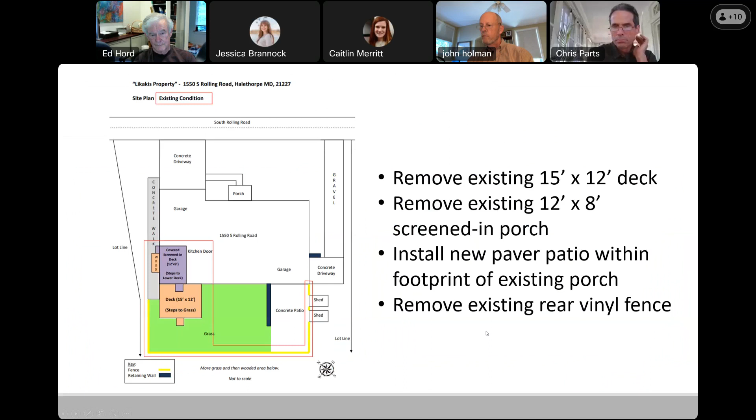First we have agenda item number 5, the Likakis property at 1550 South Rolling Road in Relay, County Council District number 1. This is a non-contributing resource within the Relay County Historic District, and the applicants have proposed removal of the existing rear deck and screened-in porch, installation of a paver patio and associated grading, and additionally a rear fence removal.

Then we have agenda item number 8, the DeLisa property at 111 North Beechwood Avenue in Catonsville, County Council District number 1. This is a contributing resource within the Old Catonsville National Register Historic District, and the applicant is seeking Part 2 approval for in-kind slate roof repairs.

Thank you, Jessica. Commissioners, is everybody okay with these items staying on the consent agenda, or do we need to pull one off for further consideration?

Hearing no objections, may I have a motion to approve the consent agenda? I would move that we approve the consent agenda. And a second? I'll second it. Thank you.

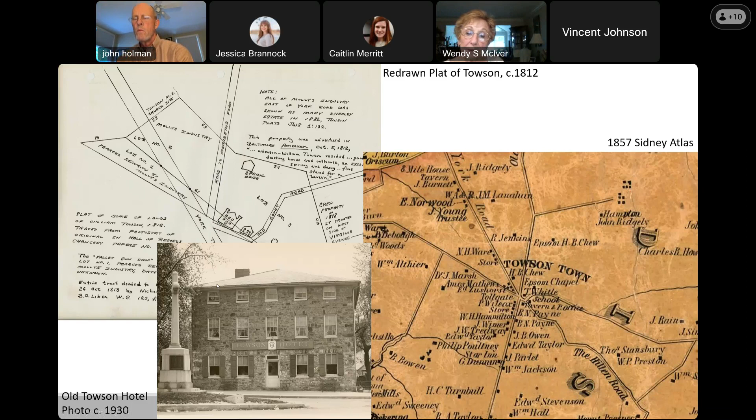The omnibus was replaced by the streetcar rail system, which reached Towson around 1863. The growth of Towson paralleled these advances in transportation. As a result, several planned subdivisions developed in various stages on the former country estates of the Harrison, Brown, Register, and Owens families.

The Idlewild community was laid out on the Register family estate. On the Harrison estate, started the community of Anneslie, and Stoneleigh was on the Brown estate.

The Owens farm, known as Aigburth Vale, located north of the Stevenson farm on the south edge of Towson, began its subdivision after the death of Johnny Owens in 1889, following the lead of adjoining property owner and trustee of the Owens estate, David E. McIntosh.

David McIntosh was a Towson lawyer who initiated the first wave of subdivision on the south edge of Towson town following his 1877 purchase of 9.5 acres south of Hillen Road on the east side of the York Turnpike.

McIntosh immediately subdivided the parcel, and in 1878 he leased his first lot to John McGrain. In 1881, John McGrain purchased his leased lot on Willow Avenue for $425.

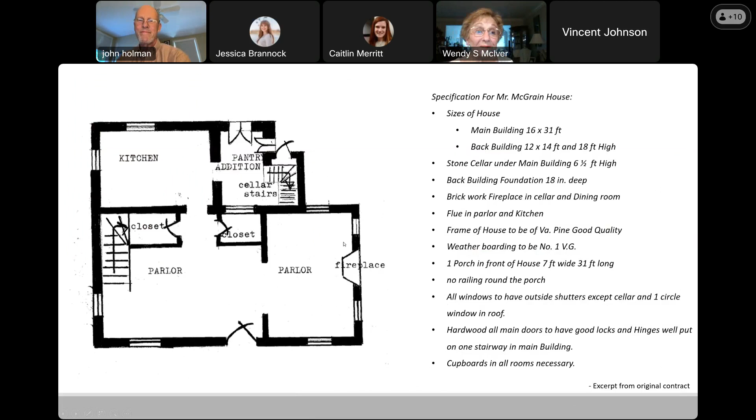The two-story frame house was constructed in the vernacular style with a center cross gable roof and a rear kitchen ell.

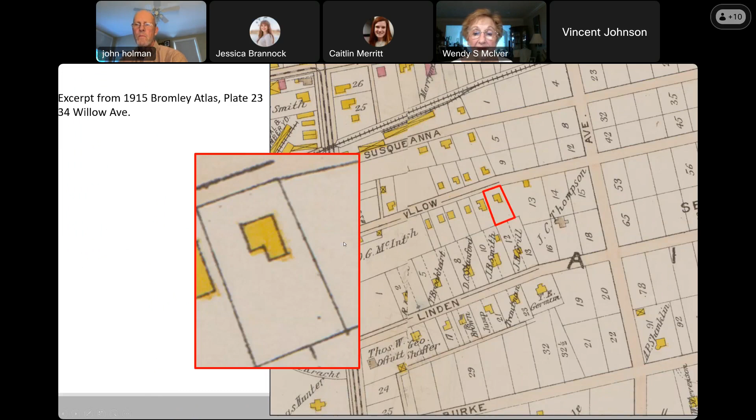The interior plan is consistent with an I-house plan, which is a structure that is 2 rooms wide and 1 room deep. This style of dwelling was very commonplace during the 18th and throughout the 19th century. Many of these structures had rear L additions, creating an L footprint.

By the late 19th century, this style was easily elaborated with front porches and other decorative details. This is also sometimes referred to as a folk Victorian style.

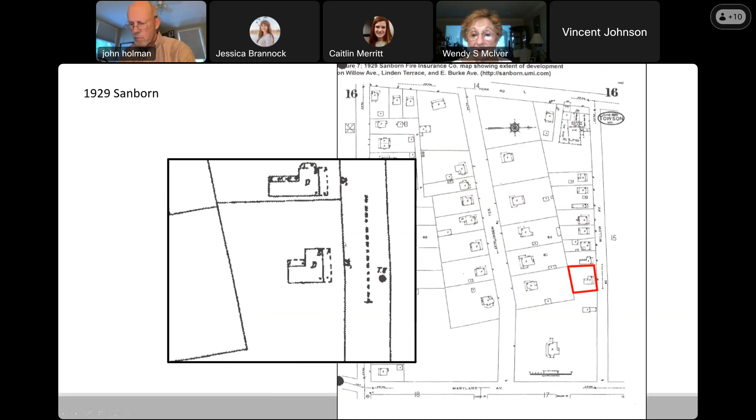At the time of the McGrain's house's construction, the spread of Victorian era styles was made possible by railroads expanding into smaller towns and cities. Architectural pattern books and trade books were a popular trend during the late 19th century and early 20th century, with A.J. Downing's being one of the popular ones.

These books were easily available to local contractors and builders, and designs could easily be altered for all classes. Post-Civil War factories had machines capable of mass-producing standardized housing elements, which made it easier to add elaborate details to vernacular dwellings, including items like turned posts, spindlework detailing, and decorative brackets and molding.

Mass-produced wood features could be transported quickly and cheaply almost anywhere by train. This made it easier to apply architectural forms to suburban residences of all classes. Home builders often simply added trim and ornament to traditional folk or vernacular houses. Older vernacular dwellings were often updated with new ornamentation now available everywhere due to these pattern books and mass production and sale of wood features.

It is evident that the McGrain house, as well as other houses in Baltimore County, shares this architectural style, as is shown on the McGrain house and other houses within Baltimore County with a similar style.

John McGrain was born in County Meath, Ireland in 1825. He and his wife entered the United States sometime in the early 1850s through New York City. Prior to moving to Baltimore County in the early 1860s, his family resided in Montgomery County. John and his wife had 6 children: John, James, Thomas, Owen, Mary, and William.

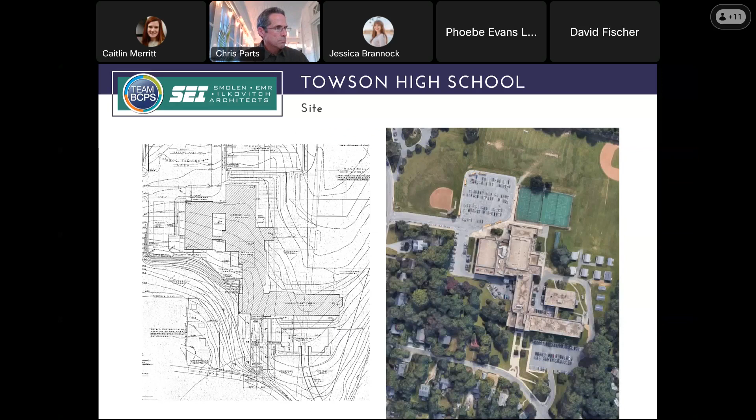Here you can see the existing site on the left, with what the site currently looks like today on the right — just general context of where we are. We are right adjacent to the Aigburth Vale property, as well as across the street from the East Burke Avenue Historic District. Our building is on both the county list as well as the Maryland Inventory of Historic Properties.

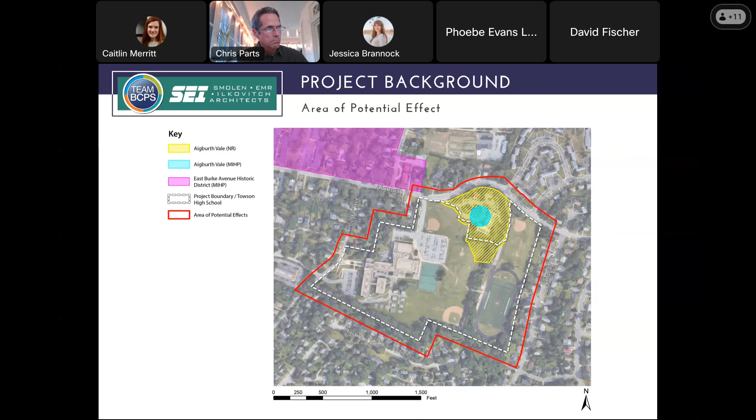Our building has been modified several times over the years, originally constructed in 1949 with an addition shortly after in '53, and additions throughout the time. One quick note: the 1998 alteration was rather extensive — every inch of the building was touched, including all new exterior doors, all new windows, and all new roofing.

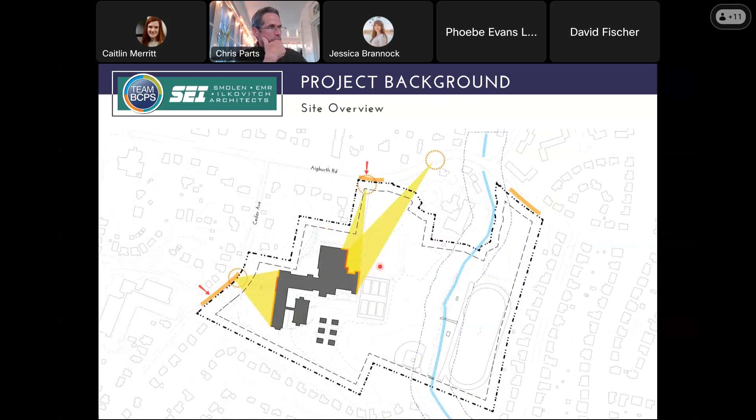Turn on my pointer. Our main entrance, which is visible off of Cedar Avenue, and kind of the auditorium entrance. I'll show you some photos of those in just a moment. Here's the moment, our main entrance and the auditorium entrance at the bottom.

So identifying some various character defining elements, the fieldstone, the horizontality. It's fairly typical of this kind of mid-century, early mid-century, late modern time period.

While we're primarily talking about the exterior for the Landmark Preservation Commission, we are dealing with the interiors as well in our work with the Maryland Historic Trust. Most of this interior has been pretty significantly affected and is no longer really intact, with the exception of our main lobby, which is at the top, as well as the lobby to the auditorium at the bottom. And then there's also existing terrazzo flooring in our corridors that's still intact.

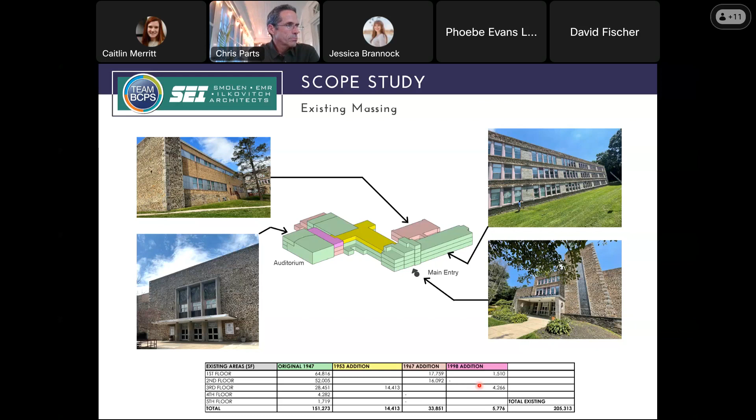So, just background on the building. When we started this project way back when, the first step was really identifying what is an acceptable scope that really balances all the needs of both this being a school building, a public building and part of the community, as well as a historic building speaking to the generations of Towson students that have passed through here. So with that in mind, we went through a process of identifying a full range of options.

They were receiving plenty of feedback throughout the beginning of this job, with people asking for various preferences, wanting to keep, wanting to demolish and start over.

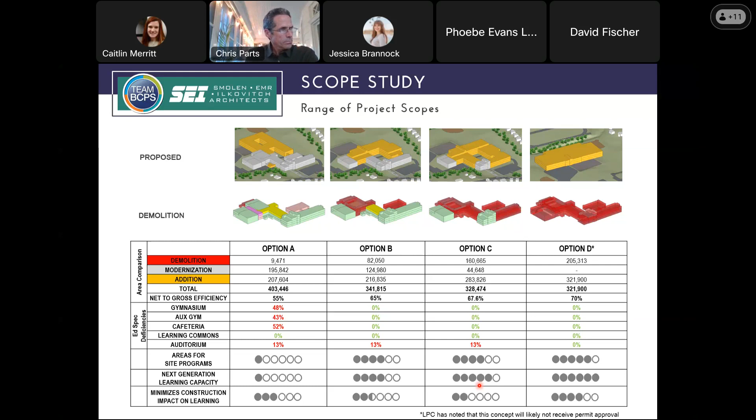And what we found was about half the people wanted to fully replace it with a brand new school, and half the people wanted to maintain the historic fabric.

We also got formal feedback from the LPC here, kind of outlining that option D, of totally tearing down the building and replacing it, would not work, would not be in compliance with county code, and we would not be able to get a permit going that route.

Similarly, with option A, they kind of understood that that wasn't really feasible to meet the educational needs of the community. So with that in mind, we ended up striking the options that didn't work and realized that we were going to need to find someplace in the middle. Surprise, surprise, trying to balance out all the varying needs, we ended up right in the middle.

So we looked to create an option that was even between B and C, right smack dab in the middle. This is where we ended up with the scope study, keeping our most historically significant wings: the historic auditorium, the 1949 classroom wing, and main entrance feature, demolishing many of the additions that were put on in 1967 and 1998, and then demolishing some of the larger public volumes from the 1949 construction that just really couldn't accommodate current needs due to their spatial limitations.

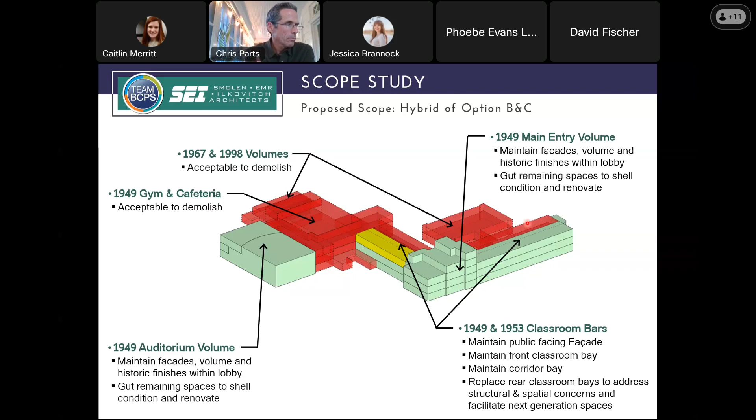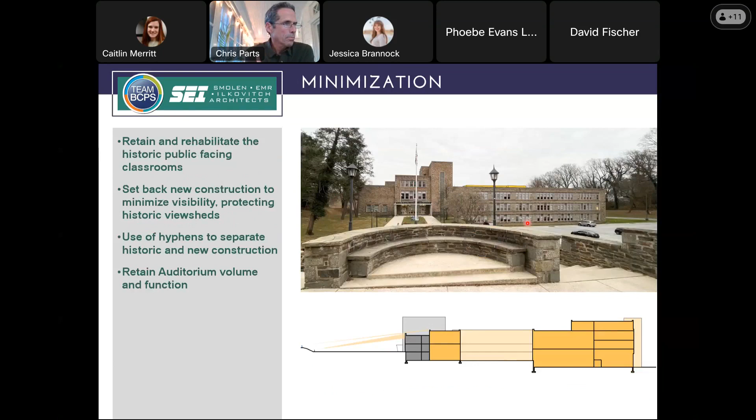This process also gave us some historic preservation strategies we came out with: what to avoid, retaining the most prominent elevations, keeping our intact interior spaces; how to minimize, making sure we're not overpowering the historic fabric by strategically locating additions; and then potential mitigation steps.

So restoring these beautiful bas-reliefs that are at the auditorium entrance, taking this historic clock off of the portion of the building that's being demolished and reincorporating that into our new design, as well as creating historic interpretation signage to locate in the public portion of the building.

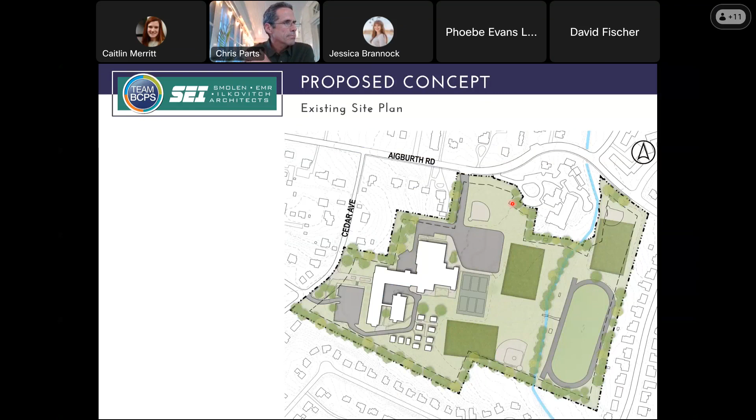So we're here to propose the final design. This is kind of where we want to show you where we ended up. We are refronting the school as one of the bigger moves of this job.

Most visitors come to the school off of Aigburth Road. That's where Google Maps sends you when you want to go to the school, so we want to make sure they're coming to the main entrance. With that in mind, though, we will be maintaining the historic entrance, including this formal entry plaza that faces Cedar Avenue. So the historic approach will remain very much the same for the neighborhood.

The building itself, you can kind of see in the gray are the areas that will be renovated. So the classrooms facing Cedar Avenue and the existing corridor, as well as the auditorium, which will be kept and maintained as an auditorium in the same location, and then a series of additions around there.

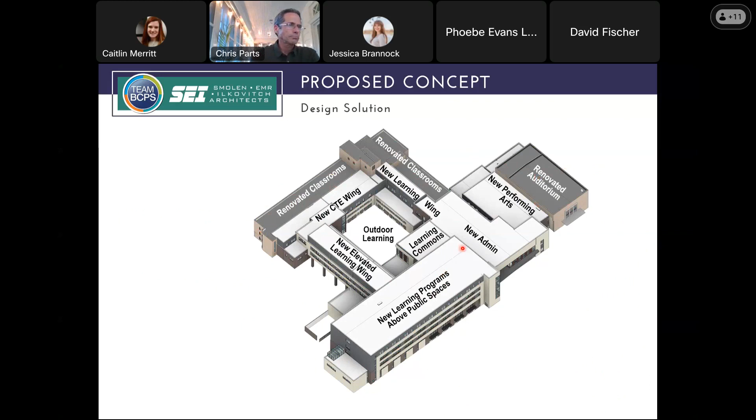So our new main entrance would be on the opposite side. As I mentioned, we're refronting the building, so we'll be right next to the auditorium entrance.

We're actually going down a level from there, just like the historic building was built into the hill. We're trying to do something similar here, with the thought process being we're trying to put a lot of new program on this site, and we wanted to try to tuck it into the topography as much as possible to help minimize the scale of this addition and try to not overpower the historic building.

This axonometric here also gives you a great impression or understanding of how we're building at the back side of the historic wing with some really large volume spaces. And you can see these big rooms, how they would not be able to fit in a bay that was the same width as on the other side of the corridor.

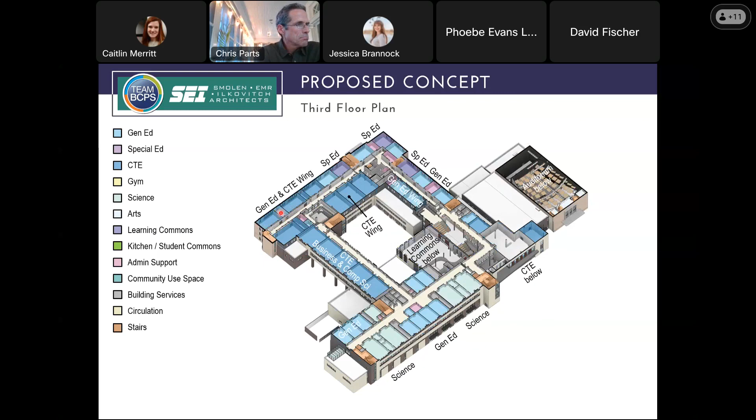So moving up, we are providing a third floor with a very similar footprint. And lastly, we do have a fourth floor in our addition here. And you'll notice this fourth floor is not any taller than the vertical elements of the historic main entry feature. All of our building's parapets are lower than that historic top parapet of the building.

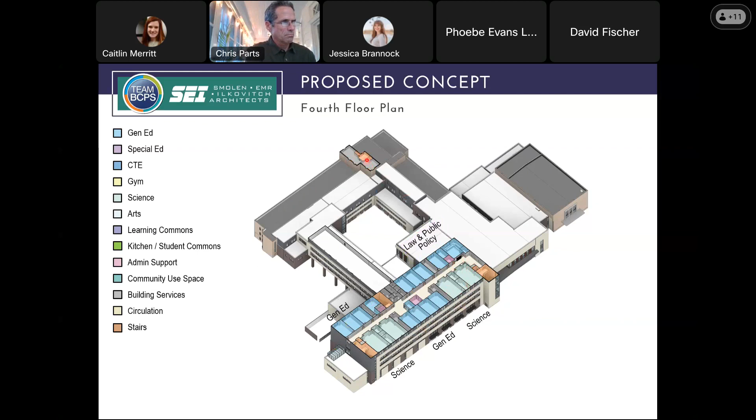So from the exterior, you can go through the elevations. And we wanted to make sure that our proposed design was sympathetic to the historic, but not looking to duplicate it. We want a clear distinction between what's existing and what's new.

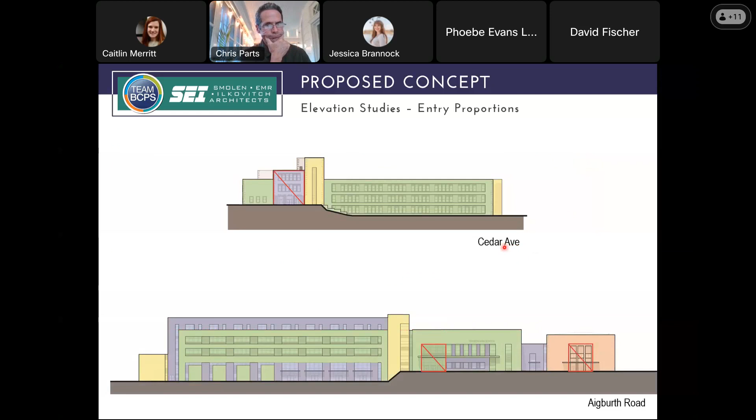So our process again started with analyzing the existing building. You can see on top is the Cedar Avenue facade, trying to understand the principles of this composition so we can then utilize those principles to guide our new design—identifying items like key datum lines, proportions of entry spaces, the rhythm of glazing, and where there's openings versus where there's solids.

Trying to utilize those elements into the new design that you see down below, with a strong emphasis on the horizontality of the classroom bar, a vertical tower element at the main entrance to signify this is where you need to come to get in, recessing our top story back visually with the change of materials, and creating that strong datum across the top that is lower than the main entry feature.

We're also utilizing what we were calling little hyphens. So where we are touching the historic, we're trying to touch it as lightly as possible with vertical slot windows of glass, as well as changing materials to a darker tone to kind of recede from view, as well as making sure the parapet lines where we're connecting are just a little bit lower and set back in plan, to just gently touch the auditorium, the historic building, as lightly as possible.

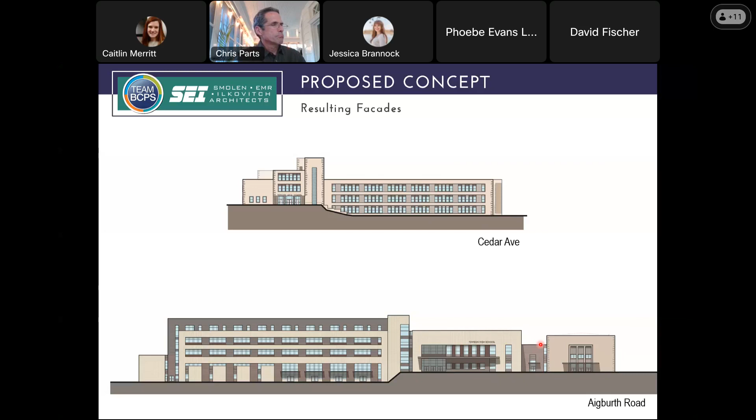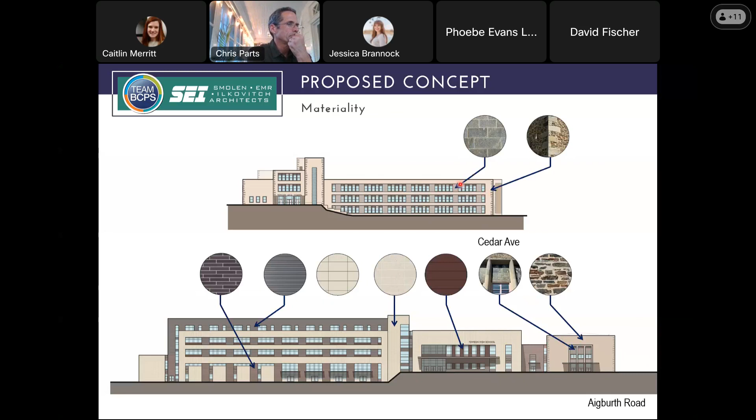Materiality is very crucial in this. We aren't looking to replicate the field stone or the granite of the historic building, because those aren't really appropriate for current school construction. That's not how schools are built these days. We want something that speaks to 2024.

So for our new building, we're utilizing predominantly masonry construction. What you see in the beige, this color here, is a concrete masonry unit, a kind of cream beige color. The title from the company is called Briar, and it really draws its inspiration from the thick mortar lines of the historic fieldstone building, trying to tie in a warm background for our field.

The vertical elements slicing through replicate the granite infill, and the horizontal banding of the classroom wing uses an iron spot brick. We'll be using a 2 1/4 by 16-inch brick, trying to get a long horizontality to speak to the horizontality of the building.

In certain locations, we transition to metal panels where structurally it makes sense to reduce our loads. So to speak to the dark brick, we have a horizontal metal panel. And on the back side of the building, rather than using the beige concrete masonry unit, we switched to a similarly colored metal panel also.

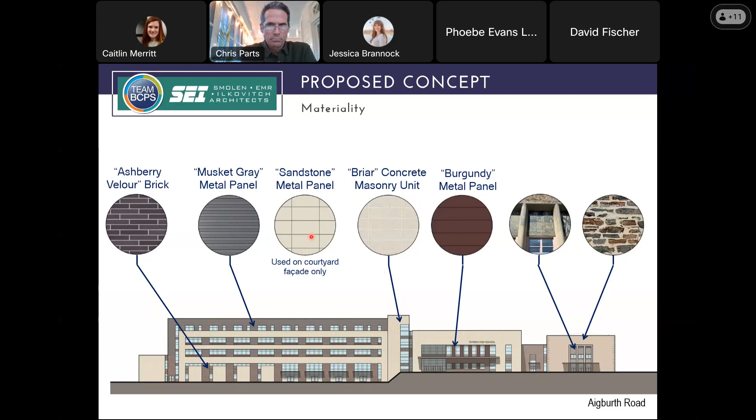So with that, I do have a video fly through. If we're doing okay on time, I'll try to get it to play. There we go, just to show how this thing goes through.

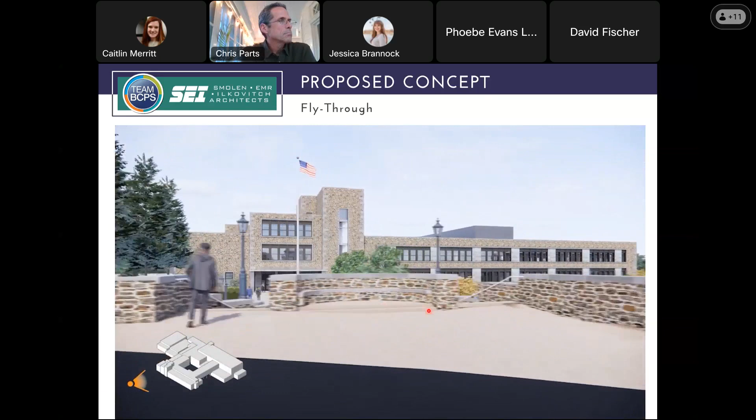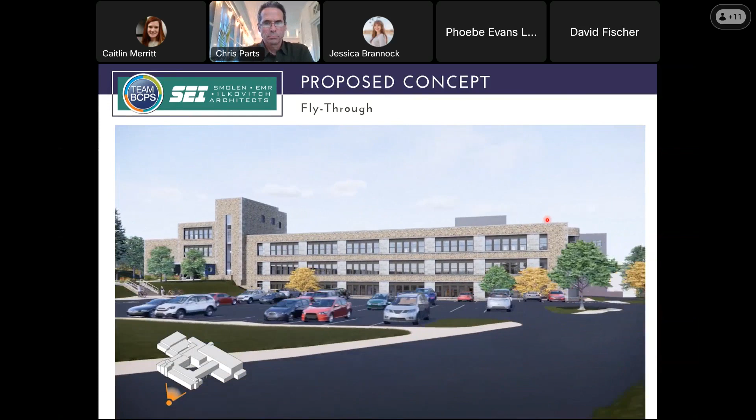You can see from the Cedar Avenue side, the appearance stays very much the same. You see a small peeking out of some of the penthouses of the new addition, but for the most part we're really tucked around and underneath to minimize the impact on the front appearance. From a drone, you'll see we are adding quite a bit of program, but from the human eye level it's really minimized by building down the hill and recessing this into the lowest part of the site.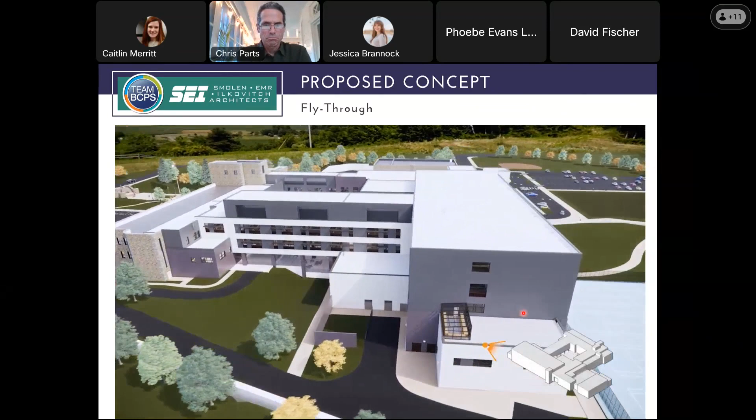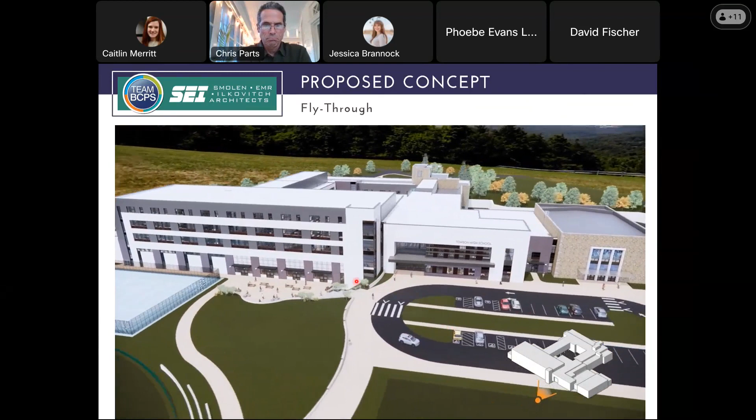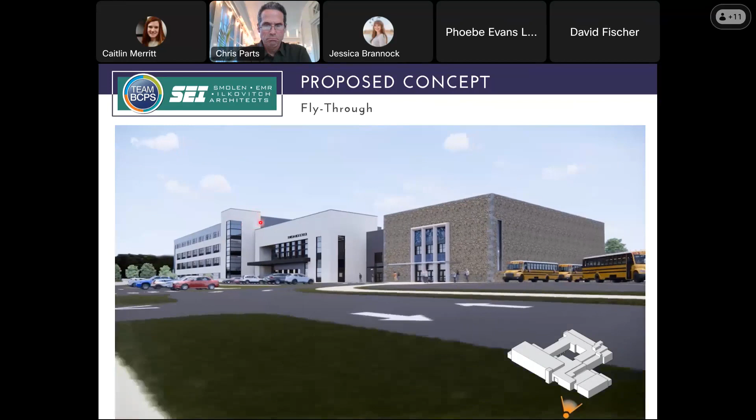Coming around to the front, you can see again how we're recessing it into the hill so that public-facing functions on the lowest level can still be accessible from the main entry level, but again it helps us bring this building down. You can see our vertical tower element here, replicating the idea of the vertical tower element at the front, with the relocated clock right there beckoning people into the site where they're coming to the main entrance.

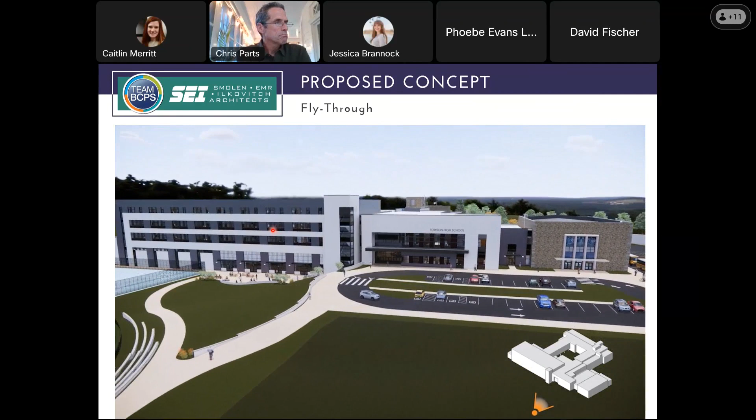You see the horizontal elements of this classroom wing similar to the existing building, and this tower is really a strong focal point to draw people to the main entrance. Our tower is just a few inches shorter than the historic tower, but very similar height.

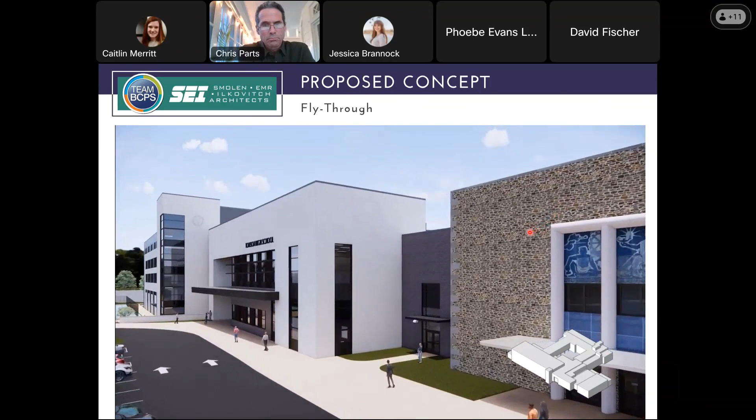Taking a couple sections through here, you can kind of see the new lobby with that communicating stair that draws people up to the second floor.

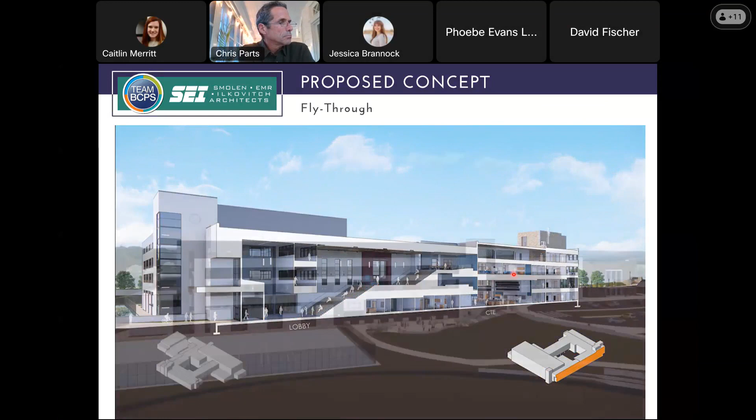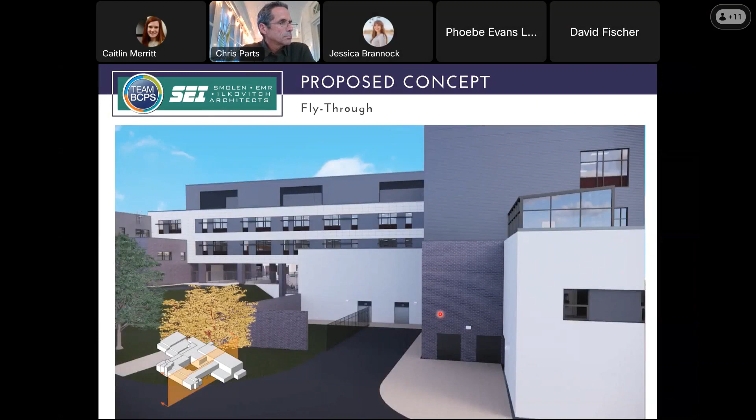Then coming around the other side, we'll cut a couple more sections to see how this is tucked into the hill to minimize the visibility from Cedar Avenue, trying to hide it as much as possible behind this parapet, with our construction built on top of the public spaces to keep this footprint as tight as possible.

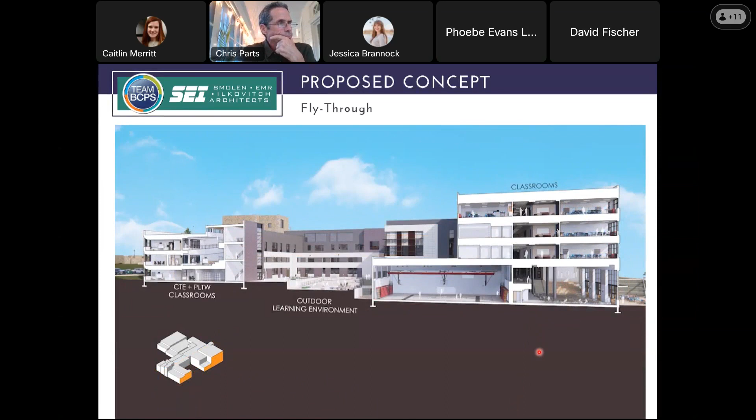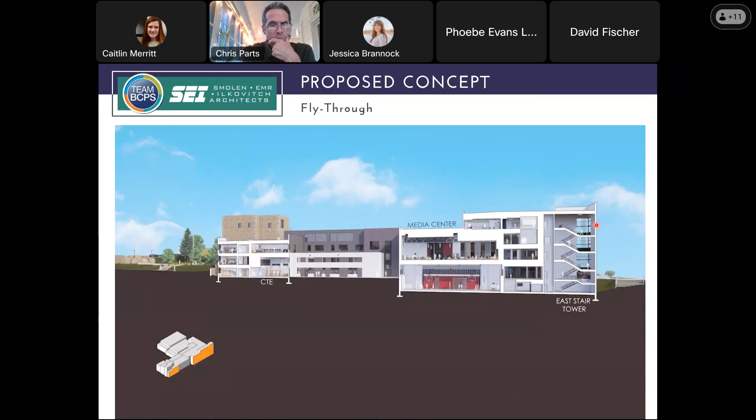So that stair tower element at the main entrance, and coming across the front, really emphasizing the horizontality of this facade. The way this rendered, this building looks really white. Apologies for that. It is going to be more of a warmer cream color, like the mortar joints of the historic fieldstone wall.

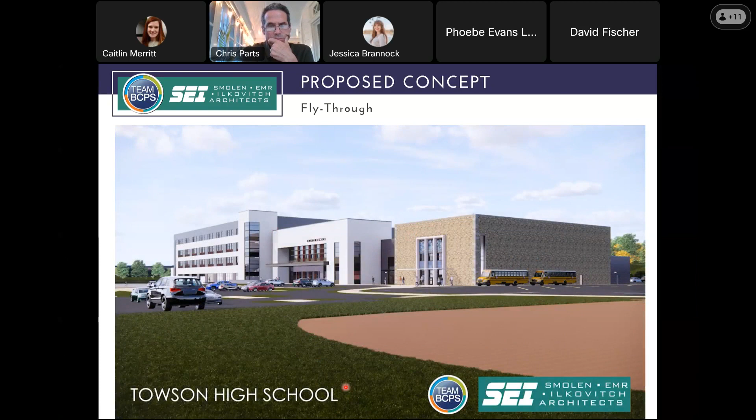All right, so just a couple stills from that video.

And with that, I'd love to end the presentation and speak to any comments or questions you may have.

Thank you so much, David. Very well done and thorough as the other times I've seen it. So very good. Commissioners, any questions or thoughts on what we've seen? John, I have a quick question.

What will be the student capacity for the new school? The proposed capacity, we're building to a core capacity of around a little just over 1,800 students.

So by core capacity, that means the large cafeterias and gyms are built for the size of 1,800 students. We actually don't have enough classrooms for that many. We're under 1,800 - that's the true capacity we're building for, but just in case down the road there are more students, we want to make sure we're building those core spaces large enough, about a third larger than the current capacity. They've got more students than they have capacity for - about 1,200 is the current capacity.

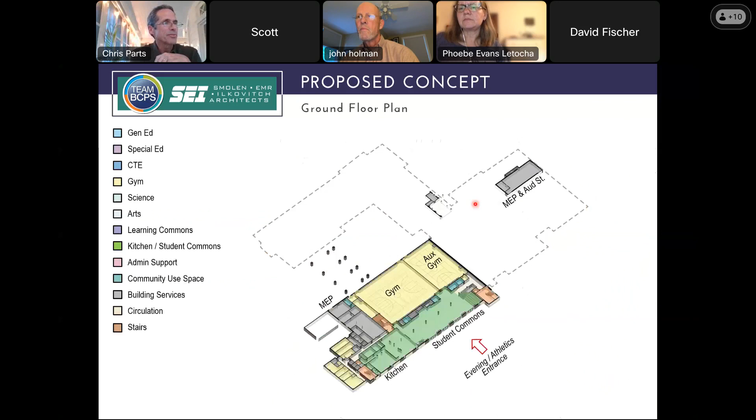I think one is, if you take a look at the east elevation, you had shown some entrance proportions in one of your diagrams, and it looks to me like the new entrance in that green piece is kind of just an overlay. You don't really read that as proportional in a similar way to the auditorium entrance, and I don't feel like the facade really reads that way if that's something you're trying to carry off. Similarly, on that facade, I think the lines you've got horizontally carry similarly to what was done on the front over that long stretch. But it seems that the vertical rectangles at the bottom kind of diminish the secondary piece of the vertical that you're reading behind that.

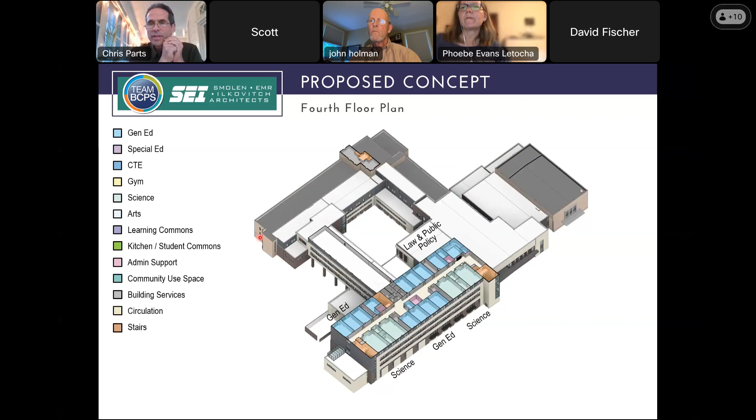My last comment is on the south elevation, basically the tower that faces the community - the Wiltondale community, I guess - where almost everything except the end of the original building on the far left is new. There's a large, I think 4-story volume there. The way most other large volumes of the building have been treated is to take a larger volume like that and create an element within it, like a framed element, like you'd see at the entrances. It looks like there are just some punched windows in the side of that. I'm concerned that if we're trying to align with the similar character of the original building, taking that larger gray volume and looking at it as an element that captures a larger volume within it might be a friendlier relationship to what the original building had done in the way they created elements in it. Those are the thoughts that I had.

Thank you, Chris. Anything you want to add to that, David?

So this side is really where we're placing a lot of our service elements, so it's a lot of programmatic drivers to not have us looking down onto that space. Also, within this window here, that's kind of defining our corridor. The other sides are classrooms, and within a classroom or teaching space, wall space is really a premium, be it for cabinetry or display boards. So it gets problematic from a programming standpoint to have a ton of windows.

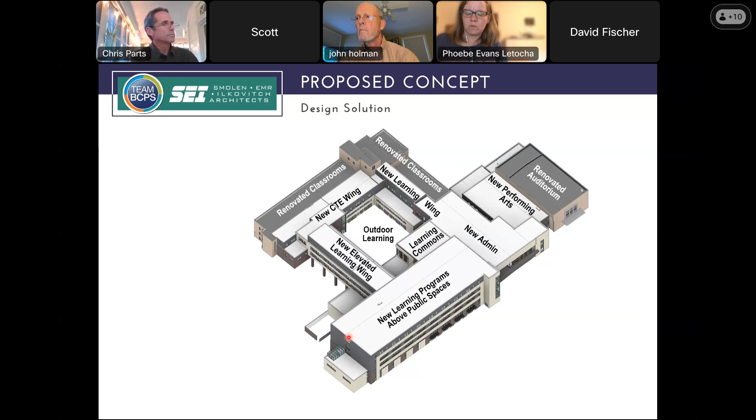This is Lili Mundroff. I did have some comments on the selection of exterior materials and how they relate to the existing building. My concern, especially with the new facade or the new entrance, is that there seems to be an introduction of a lot of different materials and colors. I understand that the original building was built over time, but there is a consistency with what's there, a consistency of natural colors and simplicity.

I appreciate that there is an intent to continue the rhythm of the windows and the way the volumes read, but my concern is that there seems to be a lot of colors and difference of materials, such that perhaps you lose that simplicity of what the original building was like.

So I'd like to see an opportunity to investigate whether some of the new colors, especially like the white—which I understand is more of a light taupe—reads very differently as a different volume. It has a different scale and texture than the existing, and that is quite in contrast with the gray and the dark brick that is selected.

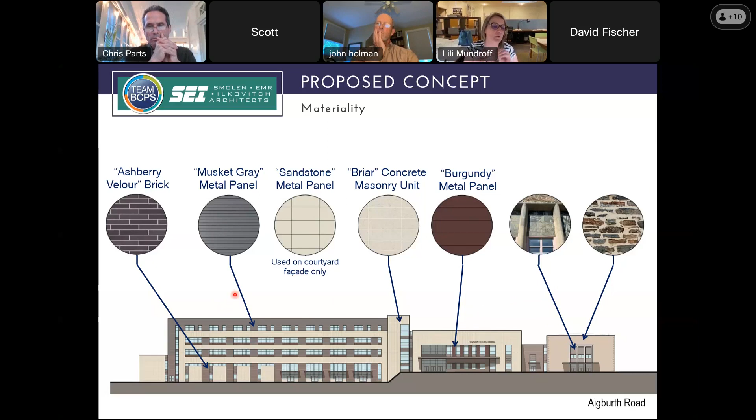One of the interesting things on the original main facade is that the ribbon windows and the panels in between them have very similar colors. Here on the new entrance, the in-between panels are taking the darker offset and bringing that back in, so you get a different reading of the horizontality of these windows—by nature of the colors, the vertical elements behind start to read as taller and more vertical.

So I just wanted to see some further studies on the materials and colors, because I do think they change from the original sense of simplicity, linearity, and horizontality that these classroom spaces had from the front.

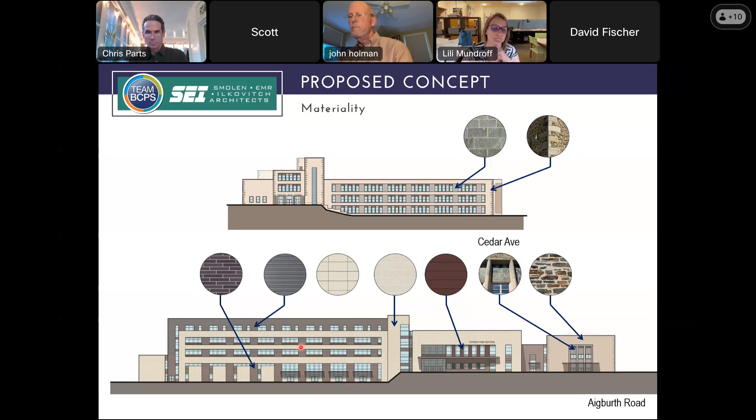Thank you, Lili. Any other comments? Yeah, this is Phoebe.

I had a question that you didn't cover in the presentation, but I noticed in the packet, and that has to do with the signage. Am I correct that there is going to be a digital sign for one of the entrances? I know currently there are two signs for the school—one on the Cedar Avenue entrance, which is kind of up above the parking lot by a beautiful weeping cherry tree, and another one on the Aigburth Road side, which is not as attractive looking.

So what is happening with those signs? I don't know the age of when they were put in, in terms of the period of significance, but I'm questioning the placement of digital signage and what's the theory behind it. I know some other BCPS schools, like in the Towson area, had some controversy related to digital signage.

So the older sign that's on Cedar Avenue, we're planning on leaving as is and not disturbing. The newer sign, which I believe is part of the 1998 project on Aigburth, we will be replacing, and that is where the new digital signage is scheduled to go.

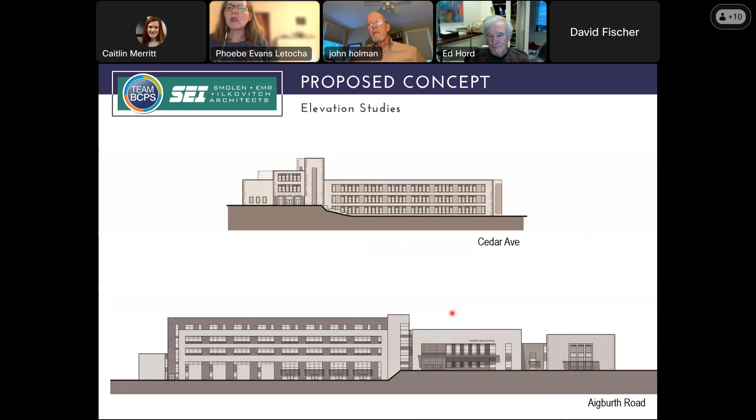The large gray mass there, I think, needs some definition—I don't know how to design it for you, but I think it ought to feel more like the one on the front entrance. If you're trying to match that, which I think is a good idea for the main entrance, to have a dialogue between the back entrance and the front entrance, having them more similar makes a lot of sense. I like the concept, but I don't think it's working—what you've got isn't getting there. So I agree with Chris, I think you need to re-look at the main entry element on this Aigburth Road entrance elevation.

One of the struggles we really had on this was there are a lot of entrances to this school—there's the historic main entrance off Cedar that we're maintaining, and also this historic auditorium entrance. Rather than picking one of the two, we tried to hybridize them and come up with something that would bring both historic entrances into unison with this new entrance. So certainly the tower element speaks to the Cedar Avenue entrance, and from the auditorium entrance, there's this really strong portal motif they've created—that's where this portal shape we've tried to create here is generated from. So it's certainly not a direct replica.

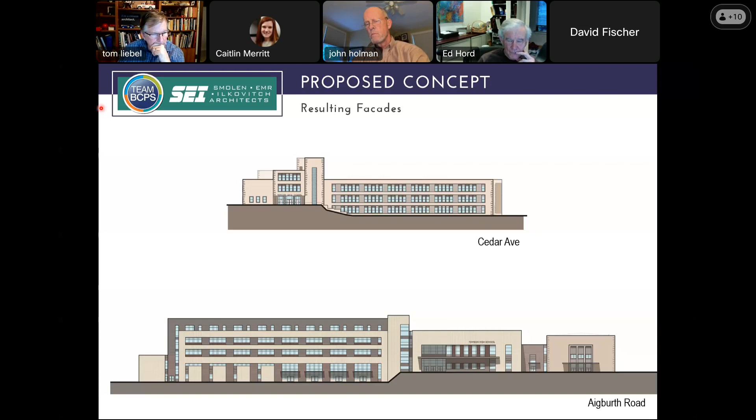So we liked the concrete masonry, and the Cedar Avenue entrance is the historic entrance, we're really trying to maintain that effect along Cedar. But this backside on Aigburth, while the building itself is landmark, doesn't have the same visibility from the streets as the Cedar Avenue entrance, as Dave pointed out from that front slide. So we took that into consideration when looking at it, and then at the main office itself.

We have our entrance, and then we have to think, from the CPTED and safety security standpoint, that we want visibility. So that's where we landed on a lot of these larger height windows and things like that to increase that. So we don't take lightly that it's on the landmarks list, but at the same time, we need to make sure we're meeting all of our criteria, because this building's going to be here for another 50 plus years before we get around to doing significant work on it again.

So we need to look at longevity of the materials, the safety and security, which is a huge thing now, and then the function for the school as well as the community. It's a hard balance, but we've put a lot of work and effort into this to get to the point that we are.

I know we're calling this a concept, and I know we've had several community meetings and made several submissions to the state at this point. I just don't know. I guess, Dave, I'll lean it back on you, but revisiting all of the materials again right now, I think is a lot, and it's really going to significantly affect the schedule of this building.

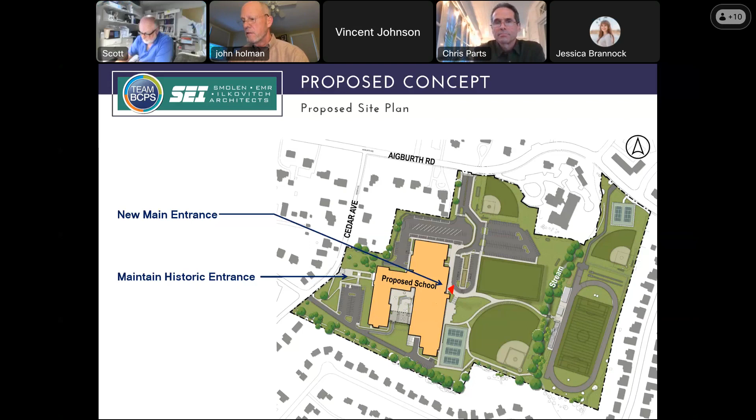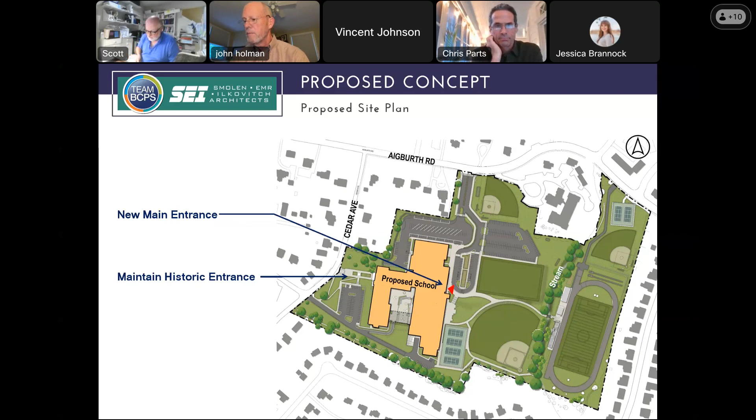And now we're on to item number 7, moving right along to the D'Antonio property at 1714 Kurtz Avenue. This is Lutherville County Council District Number 3, a non-contributing resource within the Lutherville County Historic District. The applicant has proposed the installation of a fence in the rear yard.

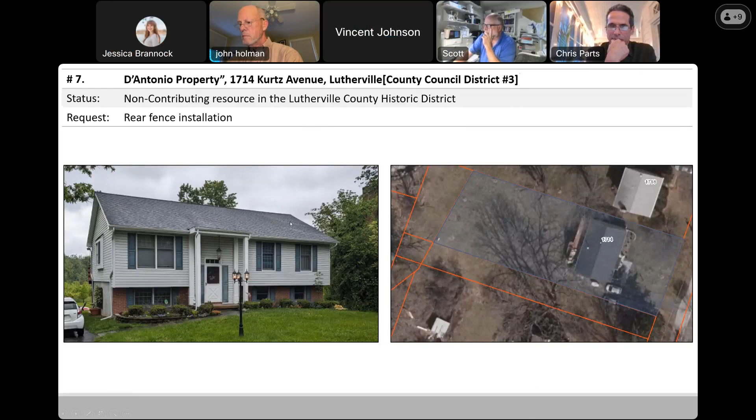They wish to enclose the rear yard and adjacent parcel with a 4-foot tall white vinyl picket fence. The fencing will begin at the rear corners of the home and consists of connecting 4 by 8-foot vinyl fence segments with dog ear pickets in the style Glendale Veranda.

The property is considerably set back from Kurtz Avenue, and the proposed fence installation will have limited visibility from the public right-of-way. The fence is properly located in the rear yard. The height and spaced picket style are appropriate. However, the vinyl material is not an appropriate material choice within the Lutherville County Historic District, and existing fencing material in the surrounding community that have been approved in the past have typically been wood or black aluminum.

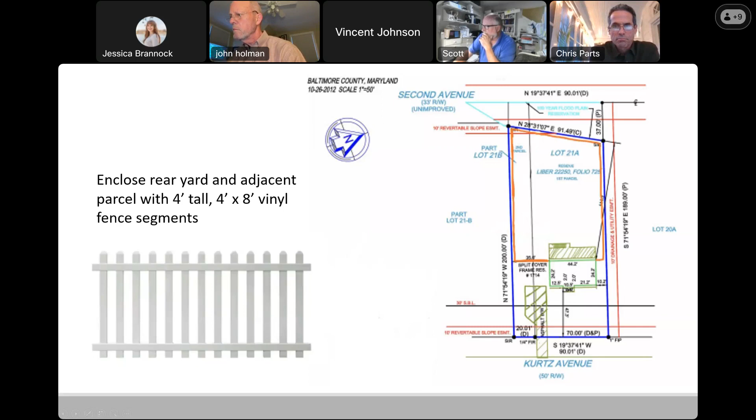The guidelines cite Chapter 6, new construction addition and non-contributing resources, as well as Chapter 7, fences and landscape. We did have a letter from the Lutherville Advisory Committee circulated to the commission earlier in the week. Staff would also note that vinyl fencing may be considered on a case-by-case basis, and that the fencing should be of an appropriate aesthetic quality that complements the building or county historic district, referring to existing fences in the surrounding community for assistance. Staff's recommendation is for the LPC to determine if the request meets our design guidelines and to approve, modify, or deny accordingly.

Thank you, Jessica. So we have before us an application to put a vinyl fence up, which may or may not meet the guidelines. Any thoughts, commissioners? Any questions?

Well, just I was curious if I'm reading my Google map correctly. It looks like this property backs up to a treed area and then to the parking lot of one of the shopping centers off of York Road. So it doesn't back up to, I mean, they have two side neighbors but no back neighbors. Sure, you can sort of see it in the one photo that there's the parking lot back in the distance. Yeah, typically, if you can see it from the road, it's a concern for us. We have in the past not approved vinyl fencing in neighborhoods. There's one case where it was on the very edge of a historic district, against a parking lot in a non-historic district.

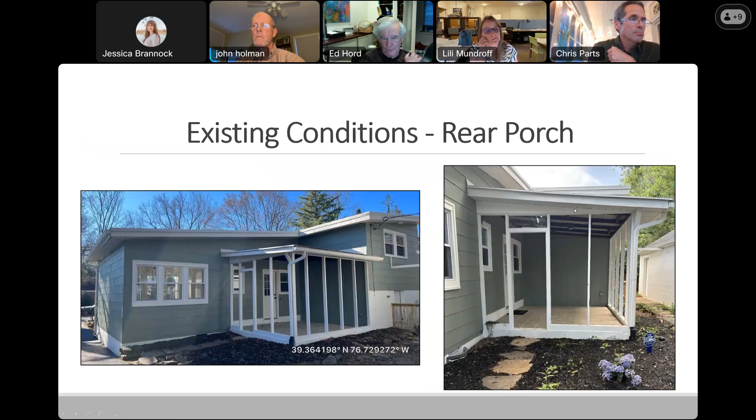Work item 1 is for the roof replacement and new gutter system installation. This includes removal of the existing roof and gutter system, replacing the roof with an SBS self-adhering rolled rubber roofing, replacing the gutter system with white aluminum K-style gutters and downspout in the same location as existing. A 12.75 by 0.5 by 4-inch solid vinyl soffit will be installed, and the walls will be framed with a new header support.

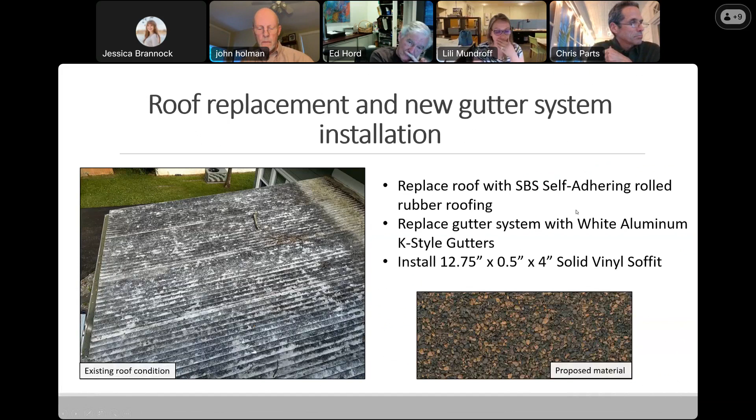Work item 2 is for windows and entry door: to install six 29-inch by 38-inch vinyl double hung windows by Windcore, and six 29-inch by 14-inch vinyl transom awning windows above each window, with one over the entry. To install a new 32 by 80-inch Therma-Tru entry door with a half light and two panels in an existing entry opening on the east elevation. Install new hardware and a vinyl rot-resistant frame. The interior and exterior will include AZEK synthetic trim lumber installed along the windows and doors, and finally a GAF 12-inch by 24-inch fiber cement shingle siding will be installed on the exterior and painted to match the existing asbestos tile on the main dwelling.

Finally, work item 3 is for the HVAC installation, which will include a Mitsubishi Sun Porch system installed to heat and cool the enclosed porch. Staff would like to note that the LPC does not have purview over the interior of the structure. So we're citing Chapter 5, porches and steps, as well as Chapter 6, new constructions, additions, and non-contributing structures. Staff's recommendation to the LPC is to determine if the proposal meets our design guidelines and approve, deny, or modify accordingly.

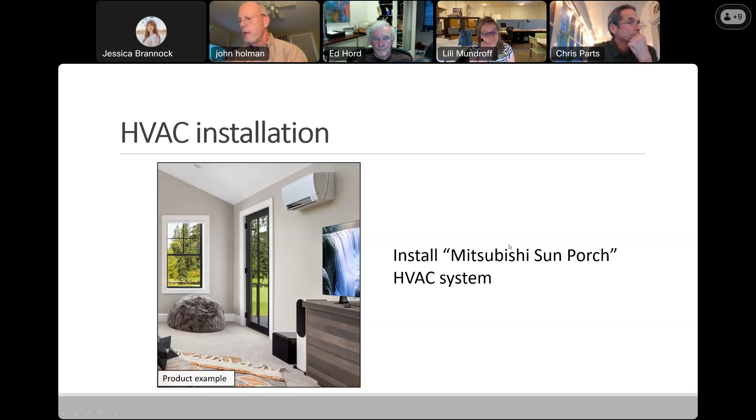Thank you, Jessica. So we've seen the plans and the materials. Any questions? Is the owner with us, by the way? Yes, we do have Mr. Dominic Smith online. Mr. Smith, I have you unmuted if there's anything you'd like to add.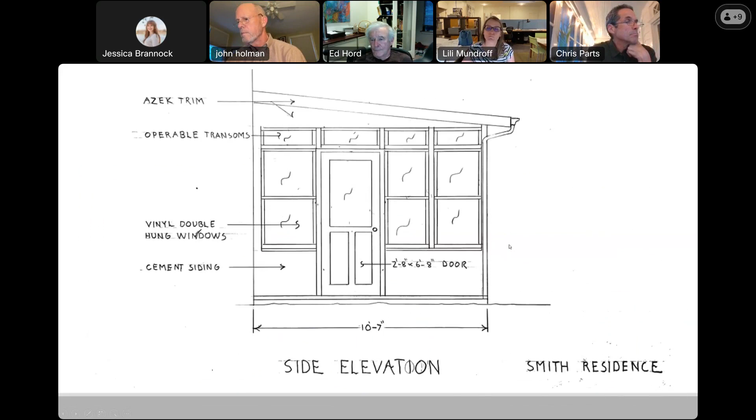I don't think so. You've got the plans there. I'm not sure if our contractor is still with us. He was at the beginning of the meeting, but I'm not sure if he's still there. What is the name of your contractor, if you could remind me?

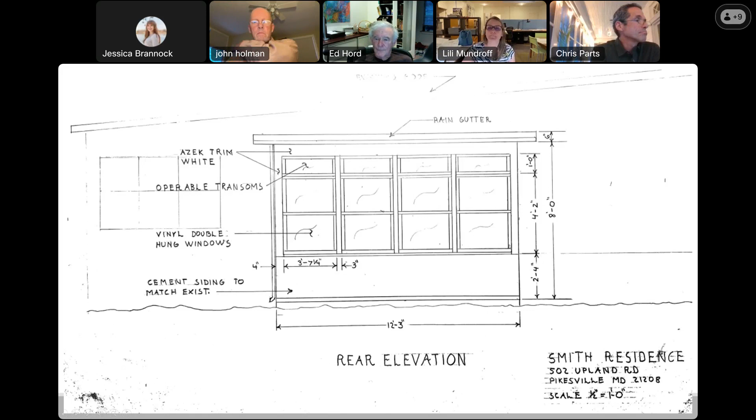Bill Frizzell. Yes, I do have Mr. Frizzell online. Mr. Frizzell, I've unmuted you if you have anything you'd like to say. Yes, I think you might have said vinyl siding.

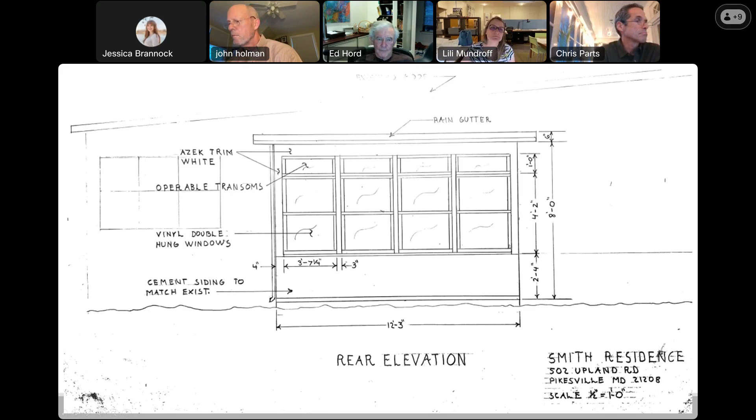Yeah, I may have erroneously said that. The siding is a cement siding that matches the house underneath the windows, not a vinyl siding. Okay, yeah, I have the GAF fiber cement siding shingle. Is that correct? Yes, that's it. Thank you for that clarification.

Any questions for either the owner or the contractor, commissioners? Hearing none, do we have any discussion? You're muted, Ed. Oh, Ed, I see your hand. I could make a motion that we could then discuss and decide if we want a second.

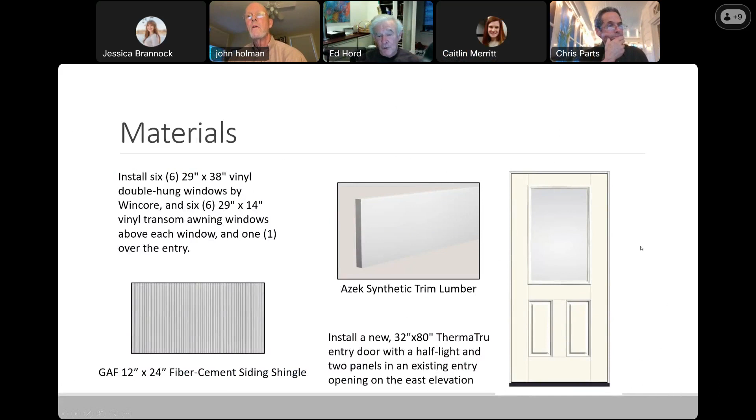I think we should approve. I move that we approve the design as presented. Second. Was that you, Tom, for the second? Yep. Thank you.

Jessica, a roll call vote? Have Lily, please. Yes. Tom, yes. Chris, yes. Vince, yes. Ed, yes. Dan, yes. Wendy, yes. Phoebe, yes. Scott, yes. And John, please. Yes. Great, thank you.

All right, moving along to agenda item 10, the Sease property at 1605 Front Avenue, Lutherville, County Council District Number 3. This is a non-contributing resource within the Lutherville County Historic District. The applicants have proposed the construction of a detached one-story, one-car garage in the rear yard and driveway extension.

This prefabricated garage will be 14 by 28 feet with an overall height of 11 feet and 8 inches in the rear yard. The garage will be set back 5 feet from the northern, or left, property line located adjacent to the rear deck.

The applicant also proposes to extend the existing driveway by 30 feet to access the proposed garage and then pave and resurface the entire driveway to be cohesive. The garage will sit on a poured concrete slab and the frame structure will have a front end gable roof.

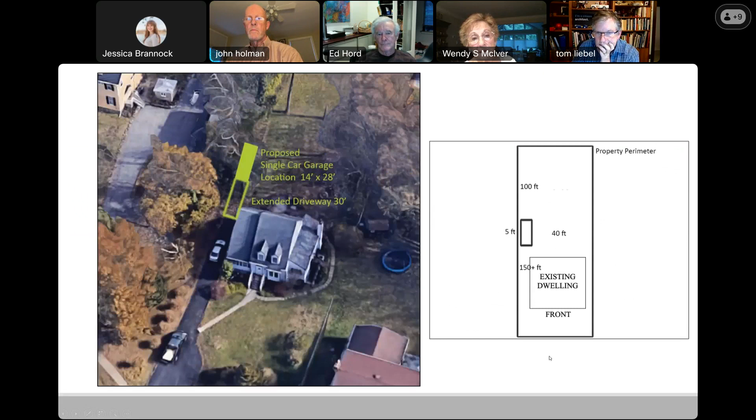Staff notes that the location, size, and height of the proposed garage are consistent with our design guidelines, and the material choice for the exterior is consistent with the materials on the primary structure. Staff's recommendation is for the LPC to determine if the proposal meets our design guidelines and to approve, deny, or modify accordingly, citing Chapter 6, new construction additions and non-contributing structures, County Code Section 32-7-405.

Thank you, Jessica. Is the owner with us? No, we do not have the owner with us tonight. Okay, commissioners, any questions, comments, thoughts?

I have a question. Do we know what other garages in the neighborhood or community look like, or what the surrounding properties look like? Most of the garages are detached for the historic, contributing properties. A lot of them are detached in the rear. This is a non-contributing property, so it's following a similar pattern of existing structures.

Any other thoughts, comments? I guess my only question is whether that is really compatible with the original structure. But it's non-contributing, so is that as critical? Well, so yes, this is a non-contributing structure, and staff noted that the location, size, and height are consistent with the design guidelines, and that the material is consistent with the material of the primary structure.

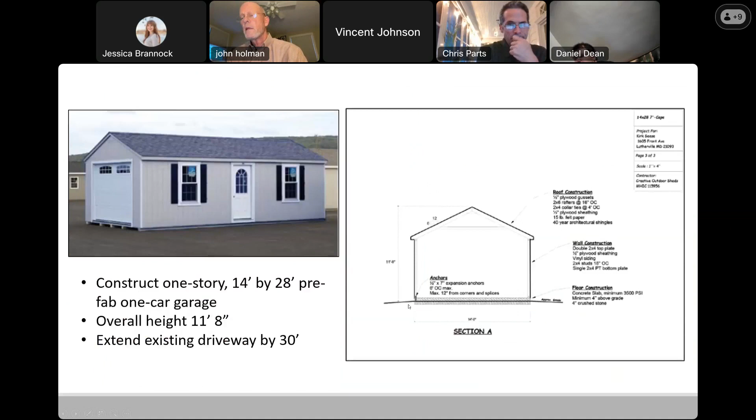Have Lily? No. Tom? Yes. Have Chris, please? No. Vince? Yes. Ed? Yes. Dan? Yes. Wendy? Yes. Phoebe? Yes. Scott? Yes. And John, please. Yes. Great, thank you.

Now to the Holtschloss property, number 11. The Holtschloss property at 18907 Hillcrest Avenue in Parkton, County Council District number 3. This is final landmark number 160, the Talbot Fagan House in setting.

The applicant has proposed the construction of a 1.5-story garage addition. The 2-story property at 18907 Hillcrest Ave was constructed in 1902 in the Queen Anne style and was locally designated as Baltimore County Final Landmark number 160 through Council Bill number 64-98 on August 22nd, 1998. The applicant is requesting to construct a 1.5-story 2-vehicle garage addition on the south side elevation.

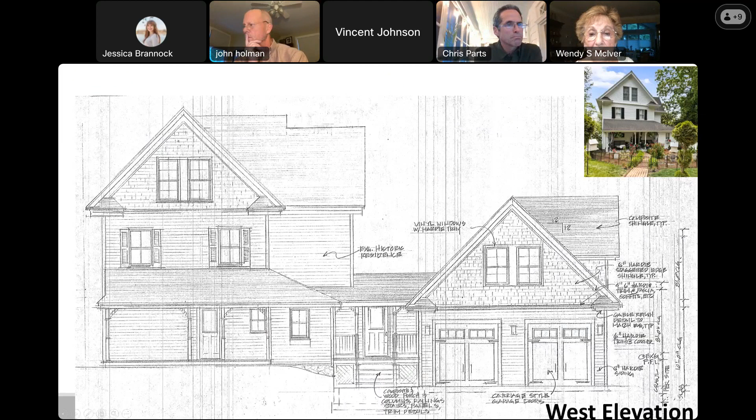Pella half-light 2-panel fiberglass entry doors will be installed at each exterior and interior entry. The hyphen will be clad in Hardie Plank 6-inch colonial rough-sawn in the color white to match the existing dwelling and proposed garage construction. Work item 2 includes the 1.5-story 2-vehicle garage.

The facade/west elevation will have 2 carriage style garage doors with 2 horizontal transom windows with 2 panels and 3 lights above each entry. 2 Pella Impervia double hung fiberglass with 2/2 grill vinyl windows will be placed on the second level of the west elevation, and 2 Impervia double hung fiberglass 2/2 grill vinyl windows will be placed on the first level of the south elevation and will be flanked by a set of millwork louvered shutters with central rail.

The 2/2 vinyl windows with a half round arch will be placed on the second level of the south elevation and will be flanked at either side by 2 Pella Impervia double hung fiberglass 2/2 grill windows. A shed roof with brackets will be placed on the east elevation; however, no additional information was provided.

The garage will be clad in Hardie Plank 6-inch colonial rough sawn on the first level and will have Hardie Plank shingle 6-inch staggered edge panel shingles in the color white on the second level beneath the gable. The roof will consist of GAF Timberline shingles in the color slate to match the hyphen and the main dwelling.

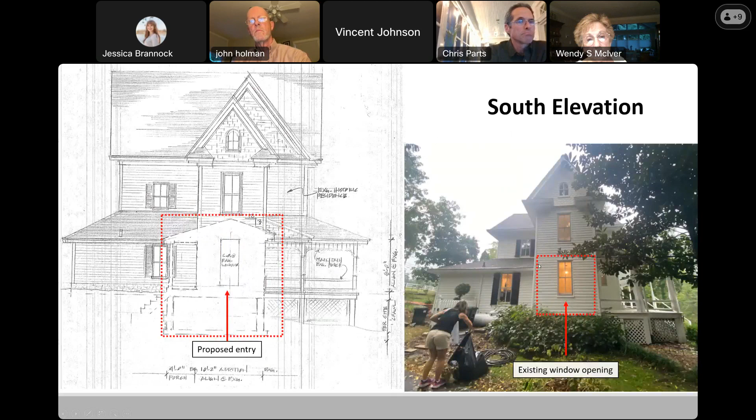Again, we're willing to discuss the shape of that. We went back and forth with doing a shed roof as opposed to a gable roof dormer. I know in the two-dimensional flat elevations it reads as quite large from the front elevation, but in reality - I'm not sure if you had the picture of the side elevation showing that dormer.

I didn't see that one in there. But we're willing to compromise. It's mostly the massing, I think, and having an attached garage that is most important to my clients, and we're willing to work with you and deal with the feedback about the details of the historical nature. Well, thank you for that - that's always welcome for us to hear as we prepare our thoughts on it.

Commissioners, any thoughts and comments? One moment, this is the homeowner - may I make one additional comment? Sure, quick. So the first floor of this home is, I don't know, a little over 850 square feet. It's small.

The other areas of the home are bedrooms and restrooms upstairs. We want to live in this home and enjoy it. The second story area of this garage is intended to be an office, but also a rec room - we very much hope we can put a pool table in this space so we can enjoy it. We have purposely designed a porch that outlooks the backyard, looking down to the NCR trail. We want to be able to enjoy the outdoors.

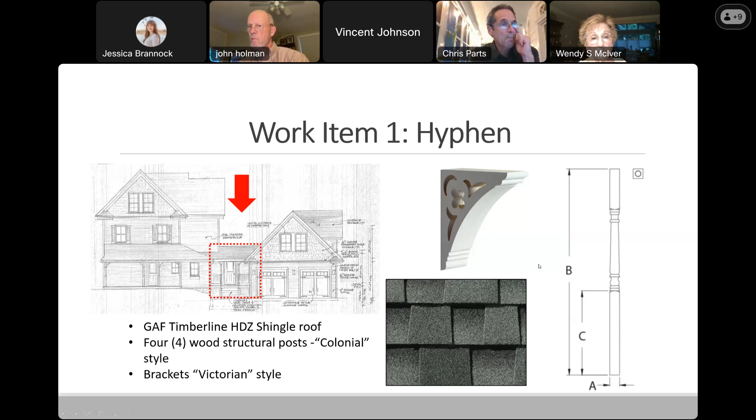Without the shed dormer on the side, it's going to significantly impact the lighting in that area, as well as the height of usable space. And as Laura mentioned, that side of the home - the whole yard - is completely bamboo. So we would very much appreciate your consideration of that.

Thank you, commissioners, comments, thoughts? This is Lili Mundroff - I was wondering whether there is a maximum height consideration for the structure. I believe it's 15 feet for garages. I'm sorry, are you asking me? If that's for a detached garage - because it's attached to the house, there's not a height restriction. Okay.

Based on the floor plans also, it looks like the front extends just a little bit beyond the front of the house - is that correct? No, actually it does not. Sorry, I just pulled it up - it sits about 4 feet from the front of the house. Okay, I guess not where the front door is, but the porch, the side porch area - I mean, I'm talking about the main.

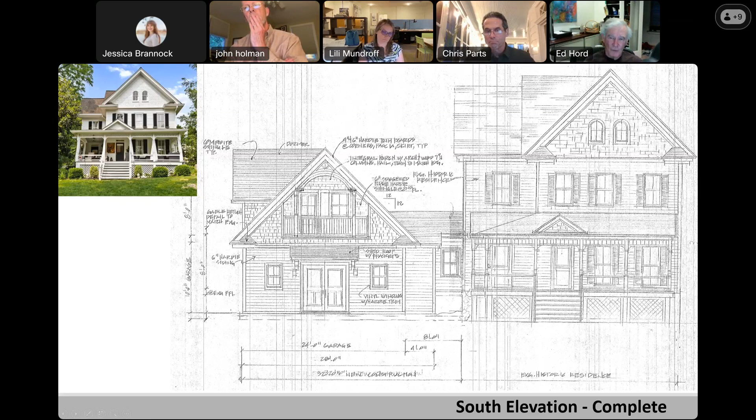I have one other suggestion. I think maybe if you went to all siding and no shingles on the upper level, it would read as - would that minimize it, you think? I'm not saying that's the answer, but I'm just thinking, if that were that way, you wouldn't think it's just mimicking so closely the existing house. Yeah, I'm for that feedback. I think because it's only a story and a half as opposed to the main house, which is 2.5 stories, that would imply the significance of the gable end with the shingle on the main house, and this is just all siding.

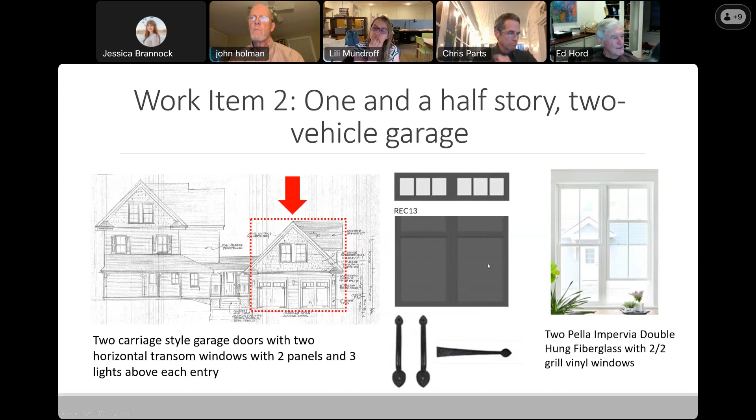So I appreciate that. I'm not sure it works to make this narrower. If this is really the garage dimension, for a person that needs accessibility, I don't think it's going to work. But I think even if you did mimic the other house so much, the height is less, it's narrower than the other house. It's only that one bay that's wider. And I think if this were treated in a way that wasn't trying to mimic the other house so closely, which we don't like anyway for historic purposes, I think it would be okay to do it, in my view.

May I ask a question? Yes, please. So I have the details of the gable returns where the roof turns back on itself at the very ends of that gable to mimic the main roof. But if we got rid of that, and also did straight horizontal siding all the way up, I think that would address some of the issues about the width feeling a little squat, which is what I just heard. So I think that combination of feedback might address those.

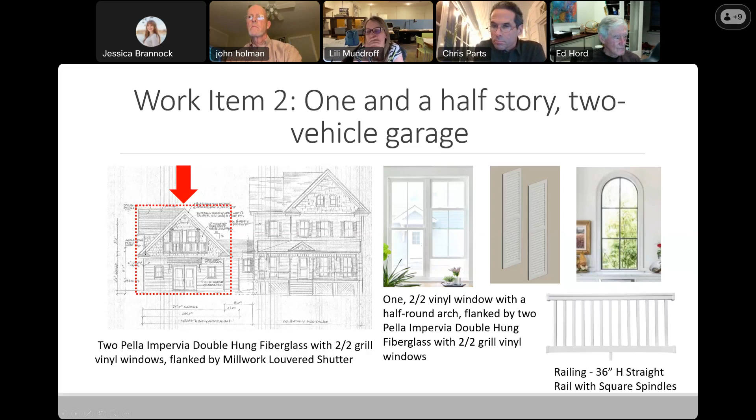But really making the garage narrower might be a challenge. It's only 24 feet, which is like a standard dimension for a garage. We could go a little bit to match exactly the front, but not for accessibility. That's why 24 feet is what we're limited to with the setbacks on the property, having that little breezeway connector piece, the hyphen as you call it, that only leaves us with 24 feet. So we're maxing out the setback. I think that's fine for a garage, but I wouldn't want to make it too much narrower.

I have one question or comment that might help get us comfortable with the fact that it won't look quite as much like the original building. I'm skeptical of using some of the prefabricated vinyl or Azek trim products because they never quite look as real as a wood product does. I like what you're trying to do in terms of the detailing here, but my concern is that if you're using the more modern synthetic materials...

It's not going to read as nice as you've drawn it. You can look at it and say it's clearly not original, but it also might not look quite as clean. So I think abstracting these principles a bit and simplifying them will help on a couple different points here.

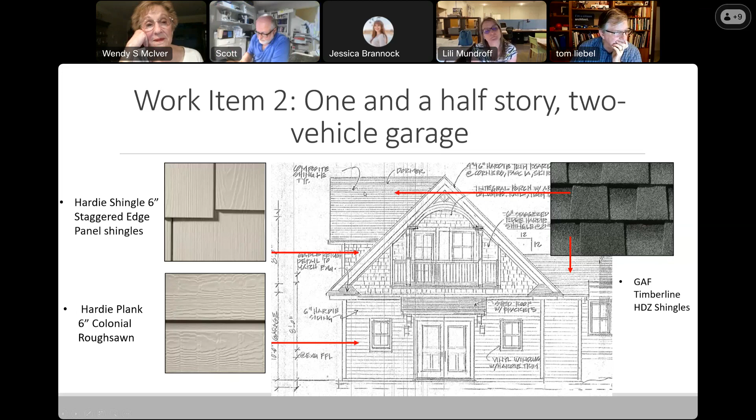Right, last but not least, we have agenda item number 12, the TP property at 509 Tulip Avenue in Halethorpe, County Council District Number 1.

This is a non-contributing resource within the Relay County Historic District, and the applicant has requested to make an asbestos siding replacement. The property at 509 Tulip Ave was constructed in 1954 and is a non-contributing resource within the Relay County Historic District. The house is sheathed in asbestos tile except the front elevation under the pent roof, which is covered with vertical plank/plywood.

The applicant has requested to replace the existing asbestos tiles with CertainTeed Monogram 5-inch Dutch lap siding in the color rough cedar. The applicant notes that some tiles are cracked and separating from the house, although no photos showing the existing conditions were submitted in this application.

In addition, the applicant has requested to replace the plywood siding around the front entry with CertainTeed vinyl straight edge cedar impressions shingle siding. As a note to the commission, the neighboring property at 507 Tulip Avenue on the left is another infill house of similar age and style that has vinyl siding. While vinyl may not be the best material choice, the LPC can be flexible when making material changes to non-contributing resources that make practical and aesthetic sense, as well as being appropriate for the age and style of the property.

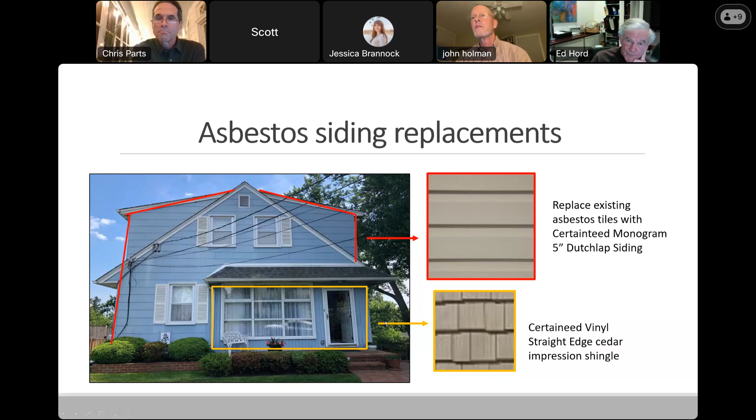I think what's being proposed looks reasonable. So we have a motion on the floor that I'll make a motion to approve. Thank you, and a second? Second. And a roll call vote? Lili? Yes. Tom? Yes. Chris? Yes. Vince? Yes. Ed? Yes. Dan? Yes. Wendy? Yes. Phoebe? Yes. Scott? Yes. And John? Yes. Thank you.

Thank you. And so we have a few tax credit applications which were approved by the staff. Do you want to run through those, Jessica?

Sure. First we have the Marshall property at 125 Rosewood Avenue in Catonsville. It's a contributing resource within the Old Catonsville National Register Historic District, and the applicants received Part 2 approval for exterior painting.

And we have the Stewart property at 4024 Stewart Road in Stevenson, a contributing resource within the Green Spring Valley National Register Historic District. The applicant received Part 2 approval for slate roof and copper dormer repairs, as well as chimney repairs.

Then we have the Hoeing property at 2316 Bauernschmidt Drive in Essex. This was final landmark number 110, Planter's Paradise / Bowerhurst and setting. The applicants received emergency Part 2 approval for in-kind copper chimney flashing and replacements, as well as mortar repointing and repairs.